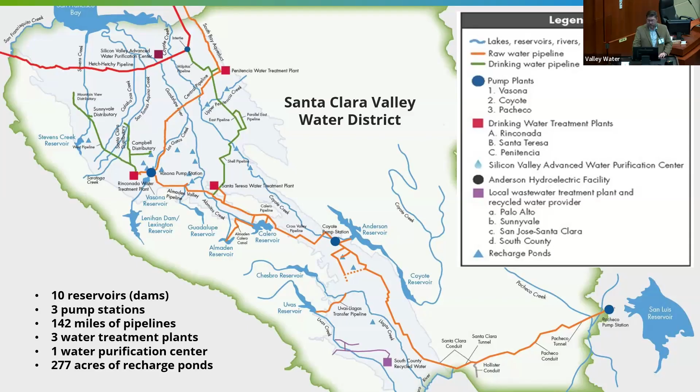Thank you, Ryan. As Ryan mentioned, I'm Andrew Garcia, Assistant Officer of the Dam Safety and Capital Delivery Division, and I will be walking through the finer details of each of these 3 projects in the Guadalupe watershed. So we'll start with Calero Dam Seismic Retrofit Project, as Ryan just mentioned, the priority project for us, followed by Guadalupe Dam Seismic Retrofit Project, and then Almaden Dam Improvement Project.

And the 2 pictures here for Calero and Guadalupe are shown maybe in a bit of a drier season, but you'll see what these reservoirs look like in the winter when they're much more full in some of the subsequent slides.

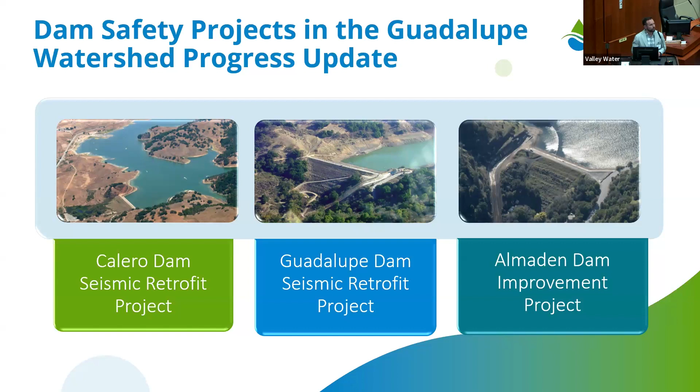So we wanted to start by talking about the dam safety program priorities. Ryan mentioned our work with the Division of Safety of Dams and how we coordinate with them to be responsible dam owners. Valley Water's mission is to deliver clean, safe drinking water. And what does that mean for the dam safety program? That means responsible dam ownership and refurbishing, retrofitting, and maintaining our infrastructure. The focus is the safety of people and properties, and of course, having the safe, reliable water supply, as Ryan mentioned.

These reservoirs are vital for groundwater recharge, but also distribution to our raw water treatment plant. So what we want to focus on for these projects is how do we get them with the restrictions lifted quicker than maybe we had originally planned.

We had received a letter from DSOD, who we coordinate with, about expediting these projects, and they're working with us on Anderson, as Ryan mentioned. So we took a look at our schedule with our engineering team and consultants and have come up with a new approach of how to tackle these three projects.

First, with Calero and Guadalupe, what we'll be focusing on is the dam embankment seismic deficiencies, as well as repairs or replacements for both the spillway and outlet works. For Almaden Dam, what that entails is spillway replacement and outlet works, either replacement or modifications.

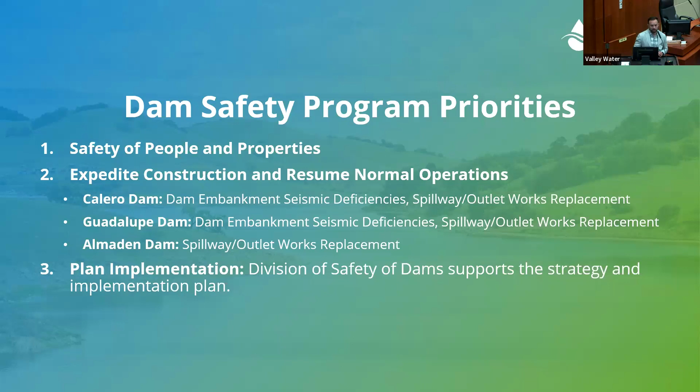So this is another view of what Ryan was talking about for the Guadalupe watershed. This helps orient you as well to Valley Water's HQ, as well as Alamitos Creek, Calero Creek, and Guadalupe Creek. You can even see here, if you look at the center of the screen, where a majority of our recharge ponds are in the watershed and how each of these reservoirs act as a system.

We wanted to zoom in here on what's labeled as the AC Canal, the Almaden Calero Canal. Our operations can move water from Almaden Reservoir to Calero Reservoir to best utilize our treatment plants, as I mentioned previously. So it's vital for us to have Calero be a priority so that we can continue to maximize the water supply from Almaden over to Calero and back up our treatment plant system while Anderson construction is underway.

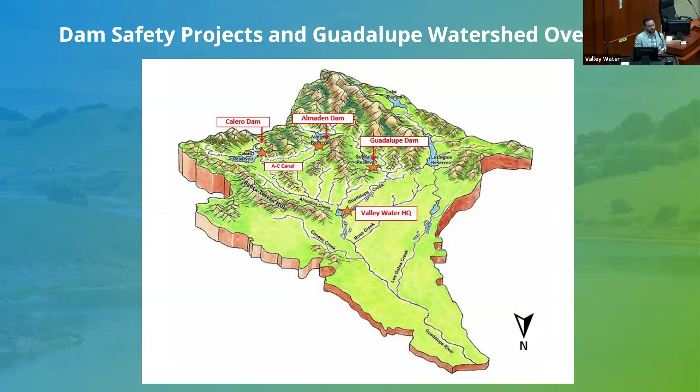Zooming in a bit on Calero Dam, again, this is a much greener picture with a nice full reservoir. This dam was built in 1935, about 98 feet tall and 840 feet long. We hold about 10,000 acre feet of capacity when it's full, and the restriction currently is at 46%, as Ryan mentioned. The engineer's estimate for the seismic retrofits, the spillway replacement, and the outlet work improvements is approximately $185 million.

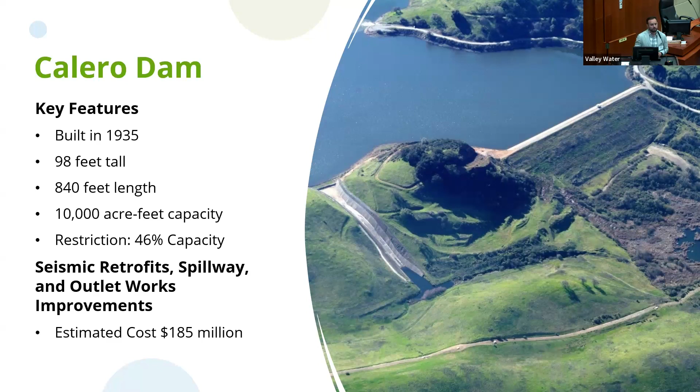So the objectives for the Calero Dam seismic retrofit project are, for the first phase, the stabilization of the dam embankment to withstand the max credible earthquake, or the largest earthquake that we would expect in the area. Spillway improvements, so constructing a new spillway to pass the probable maximum flood, or again, the largest flood that you could expect in the area that we would anticipate and be designing for.

One unique feature about the Calero project is there is a historic structure located on the southeast portion of the reservoir rim called the Bailey House that we would be moving west after we breach a small dike near that house to move it out of the inundation zone. Some other small safety enhancements include a slight raise to the crest height, as well as a filter and blanket drain to bring the dam design up to current safety standards.

One thing I wanted to mention here is this phased concept that you're seeing on the screen. So what we're showing is a first phase and a second phase. Previously we had envisioned these construction activities to occur all under one phase. But as we looked at how we could best expedite the construction, how we can do work without draining the reservoir, we can focus on the embankment and the spillway and everything on the downstream edge of the embankment rather than the piping system itself.

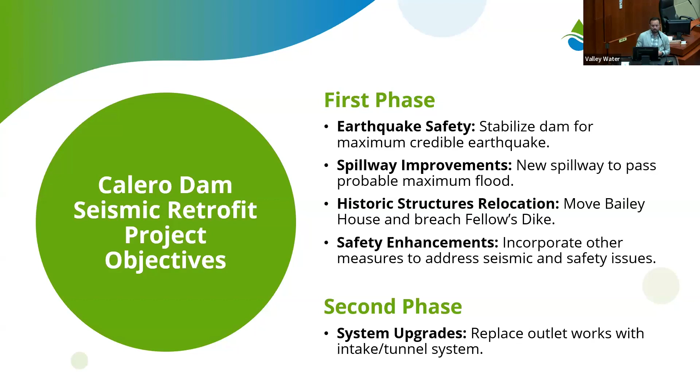So the status of the Calero Dam seismic retrofit project: the planning phase has been completed. We do expect this summer the phase 1 engineering design to be complete for the embankment and the spillway. Most importantly, for folks wanting another opportunity to participate and comment on the project, we expect to release a draft EIR, or environmental impact report, this summer. Finally, after we get through the environmental and permitting process, as well as the design process, the plan would be to start construction in spring of 2028.

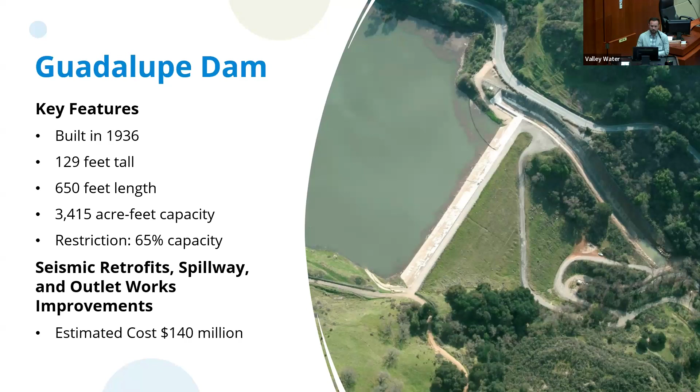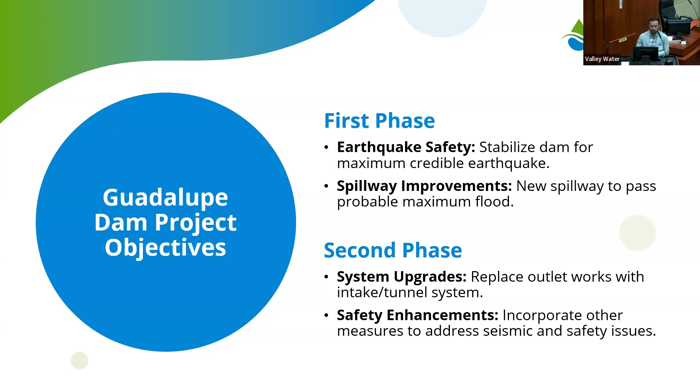Similar to Calero, the Guadalupe Dam project objectives are to stabilize the dam embankment, improve the spillway, and expand its capacity for the probable maximum flood, as well as replace or modify the outlet works and intake system and other small safety features. This is also envisioned as phased construction so that we can start sooner and hopefully get ahead of the inflation costs we see on so many of our large capital projects.

The project status for the Guadalupe Dam seismic retrofit project: similar to Calero, the planning phase has been completed, and we expect 60% design on phase 1 work for the embankment and spillway to be completed this summer as well. The environmental documentation will be pushed a year further as we worked with our partners at Division of Safety of Dams and internally on resources for these large undertakings of developing draft documents. It made sense to push it out so our regulatory partners had the resources and time to review the Calero document first, followed by the Guadalupe document - staggering those by a year. What that means for construction is we likely would start, and we're planning for construction to start, in 2029.

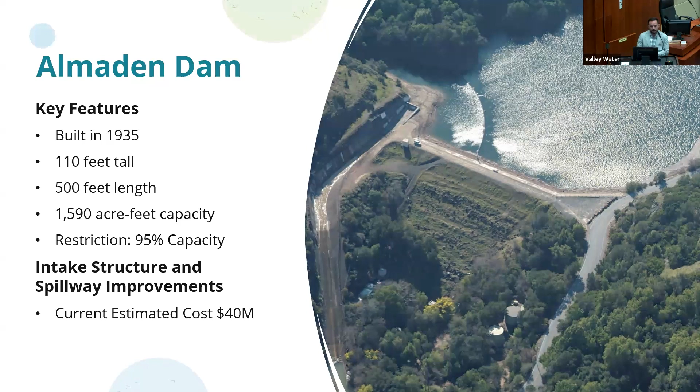The objectives for the Almaden Dam Improvement Project: the embankment has been deemed structurally sound, so we will not be doing large embankment work as we will on the other two projects. We are anticipating replacing or modifying the outlet works and intake structure, as well as the downstream energy dissipation structure. We will also be looking at improving and constructing a new spillway to pass the probable maximum flood and expanding capacity there. Finally, some other small features, including incorporating a blanket drain and a small crest height raise.

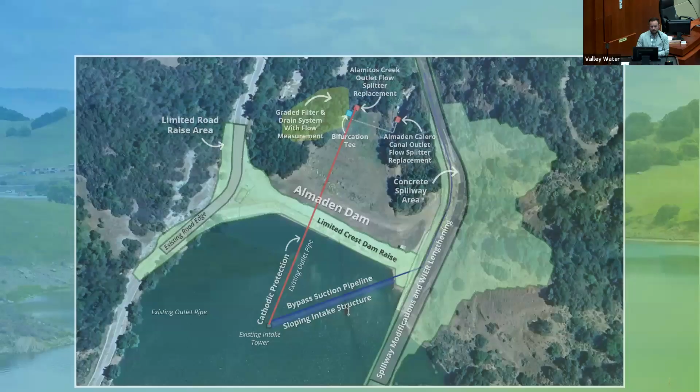A final look here, a bird's eye view of the Almaden Dam Improvement Project and the different project components. On the left abutment, we're looking at the road edge and slightly raising the road, as well as on the right abutment, looking at the spillway modifications and the lengthening of the weir to expand capacity there. And finally, the sloping intake structure shown in blue, as well as the limited dam crest raise on top.

So the status of this project: it's a little bit further behind the other two. Planning phase is nearly complete, at approximately 90%, and project design commenced this year. We expect the inlet structure and spillway design to be 50% complete by the summer of next year. The environmental documentation will be pushed a little further out, looking at 2029, and construction is expected to start the following year.

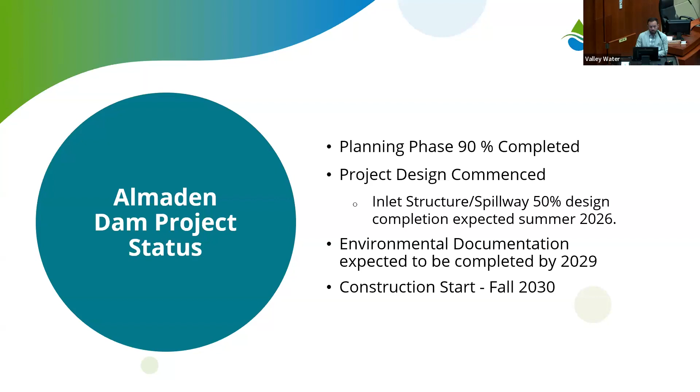So we put together this nifty table. We don't expect everybody to read it all at once, and I'm not going to read it to you, but we wanted to have a good reference document to look back on to see when those draft environmental impact reports are coming out, when we expect construction to start, and how long we expect construction to take: approximately 3 years for Calero, approximately 3 years for Guadalupe, and about 1 year less, approximately 2 years, for Almaden Dam. This will be a good reference document for folks interested in seeing when public comment periods might open, when the EIR might be released, and most importantly, when construction will likely start.

So with that, that's a quick run through of what the project components are and how we're looking at each of these three projects. What can you do next? The next thing we wanted to recommend is to continue to stay involved. The Calero project, as I mentioned previously, we are looking at releasing the draft environmental impact report this summer. There will be a public comment period where members of the public will have an opportunity to comment and work with us to incorporate any comments or concerns.

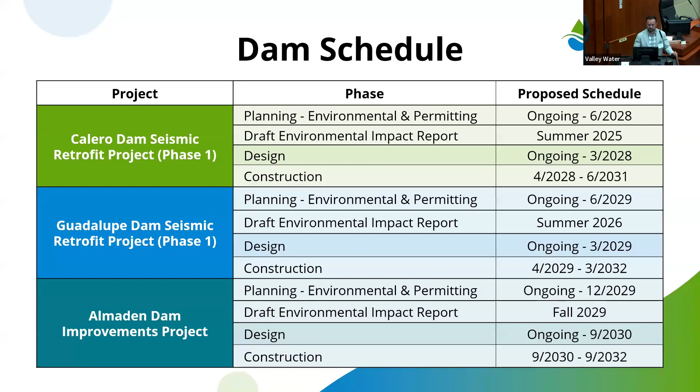So maybe we can go back to show where Fellows Dike is - you can see it on the bottom right of that image, just north of the Bailey House. This reservoir is lower, but if you imagine the reservoir being more full or near the top - every reservoir gets a conical shape, right, so it pinches out near the bottom and gets wider as you get to a higher elevation. So that last couple feet where Fellows Dike is actually represents a substantial amount of the water supply and storage in the reservoir. That couple feet that we lose by not raising the water level as high means we lose out on a lot of our storage.

Also, in coordination with the Division of Safety of Dams, they've deemed that this dike has issues as well. So rather than trying to retrofit the dike and make that safe, it's more cost effective and better overall for the project to move the Bailey House and breach the dike.

Thank you for that response, Andrew. Jose? Here's another question.

How can I receive future updates or information about meetings related to these projects? You mentioned that there's a draft EIR meeting coming up potentially in the summer.

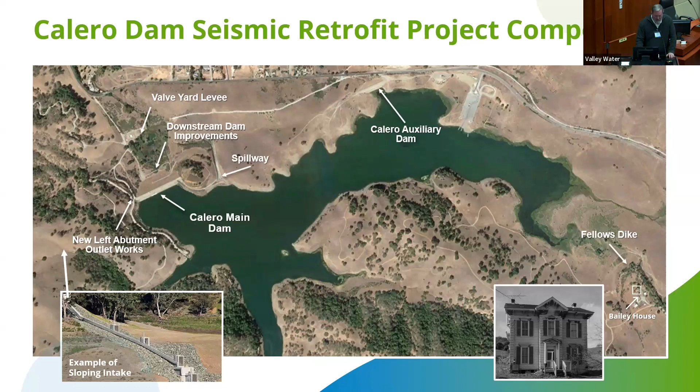Great question, I think I can even help with this one. At the very end it had the community liaison, Jose Villarreal. You can send him an email and sign up, or you can just register on the project webpage, and you will receive updated information as well. You can click on just this project or other projects too when you go to that link.

Great question though, great. Do we have any other questions coming in, Jose? It seems like we might be nearing the end of our community questions. Okay, so another question here.

Is the water stored in these reservoirs from local rain runoff, or is it coming in from other areas? I think we've got Ryan to answer that question.

Each of these reservoirs is somewhat unique, but primarily, yes, they are storing water from rain, from the watersheds that they hold and impound behind the reservoirs. But like I mentioned previously, the Calero Reservoir is actually connected to a pipeline, so we can put imported water from the San Luis Reservoir, pumped all the way through South County and Gilroy into Calero Reservoir and store it there. So that's one reservoir where we can add imported water that's not from natural rain. They all have a bit of a watershed, so some of that is local runoff, but primarily imported.